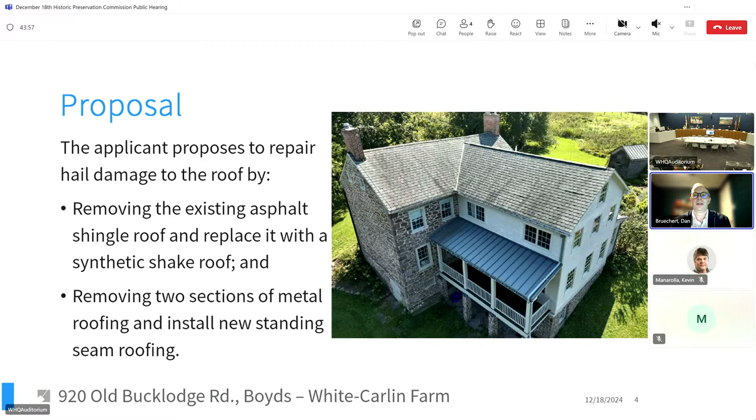So in its analysis in the staff report, staff was guided not only by the standards, but also by Preservation Brief 16, which talks about a framework for analyzing when substitute materials are appropriate on historic buildings, and how to evaluate proposed substitute materials.

Including what sizes and shapes are available, what variety of color choices there are, how stable is the color, will it age or weather the way a natural product would, what is its impact resistance or flame spread rating, what are the installation requirements of the new material since those may not be the same as the original material, can the feature be custom produced if ready-made ones of the new material are not available or an accurate match, and what is the expected lifespan or warranty?

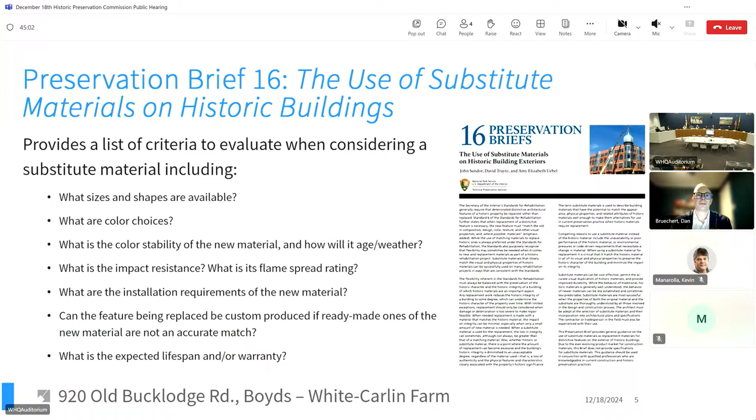So again, the proposed material is a Brava cedar shake, which is a synthetic shake. The shingles are provided in 3 widths to provide some size variation in the appearance of the finished roof. A material sample was distributed at the previous preliminary consultation, and I believe the applicants and their representative also have samples if the commissioners would wish to examine them in the flesh this evening.

Next slide. This is the front of the subject property. There is an existing asphalt shingle roof that's failing due to hail damage. There are also some underlying structural issues with the roof, which would be addressed at the time of removing the existing roof prior to reshingling.

Next slide, please. Again, these are just examples of 2 different colors of the shake. We have the aged cedar in the upper left, which is the mottled color that's proposed by the applicants, and then there is what I believe is called the natural color in the lower right.

Next slide, please. So staff visited multiple sites that had the Brava cedar shake installed. In the upper left, you see one example. This happened to be right next door to a house that had a natural wood shake roof on it, so that provided for direct comparison. I believe that was 14 Flame Leaf Court in Gaithersburg.

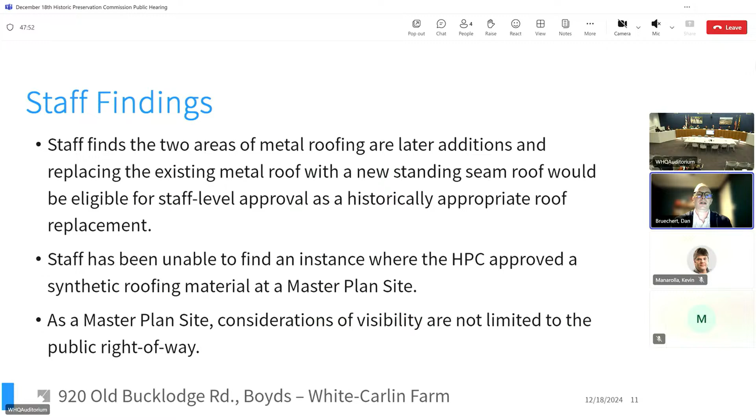A reminder, as a master plan site, considerations of visibility are not limited to the public right-of-way. This is for the visibility of the site from any location, including on the site itself. Next slide, please.

So staff's primary concerns with the material are its color and its reflectivity. The mottled appearance, which is intended to emulate aged wood, staff doesn't find to be a convincing substitute under 24A8B1 or 2. Additionally, staff hasn't been able to see a shingle without its sheen. The product representative relayed that part of the reflectivity was due to chemical release applied to the mold so they would peel off easier, and that the shingles will dull over time.

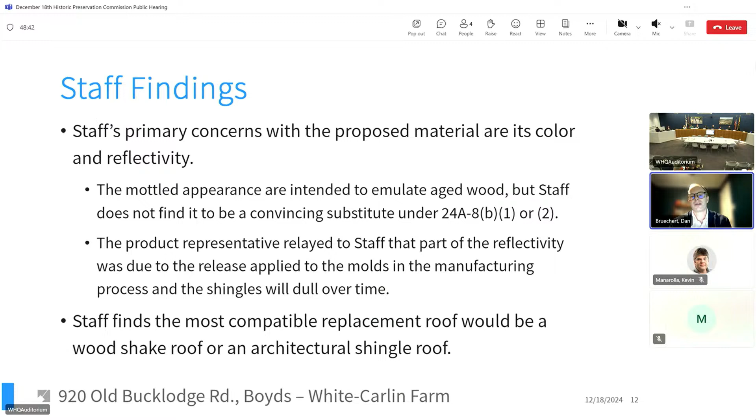The applicant did provide 2 photographs, which can be shared during their presentation. But staff finds that the most compatible replacement roof would be either a wood shake roof or an architectural shingle roof. And with that, I will answer any questions that you have at this time.

Are there any questions for staff?

Commissioner Doman: Of concern here is that this particular residence is a master plan site. If this was not a master plan site, would we consider these shingles applicable? Is it strictly because of the category that this house falls in that it's not acceptable? Would it be acceptable on something that just happened to be in a historic district?

Thank you. Based on staff's observations of the material, we don't think it would be appropriate on an existing resource in a historic district. The analysis for new construction or an addition in a historic district would be a little different and would likely be district dependent because so many of those have very specific district design guidelines. So in one district it might be acceptable, in another it might not be. But because we're dealing with a master plan site, we're limited to Chapter 24A and the standards as our guiding principles.

Yeah, I was just interested if there's any way the product could be installed so we could get historical information about how it holds up. I mean, would this be acceptable on a non-contributing resource in a historic district? Well, we haven't had that proposed yet, so we don't know. What I can say is that the applicant did provide us with 6 addresses where we know the material is up and can be periodically evaluated moving forward, but that's not going to give us an effective answer for tonight's discussion.

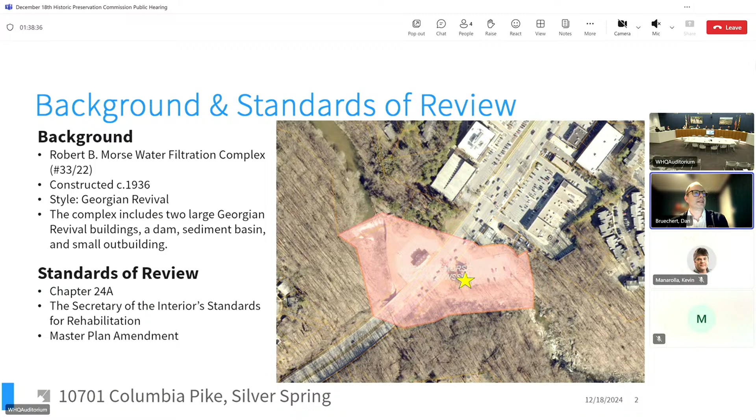Although the Morse filtration apparatus has been removed from the site, the distinctive pump houses and dam structures still stand. Next slide, please.

Montgomery County Parks is the applicant with Springsong Museum as its partner. The applicant proposes to rehab the southern building and its surrounding hardscape and landscape to create the Springsong Museum, dedicated to Rachel Carson and her life's work. This includes a large building addition constructed for museum operations, removing and replacing the existing windows, and landscape and hardscape alterations, including installing a solar array in the parking lot. Next slide, please.

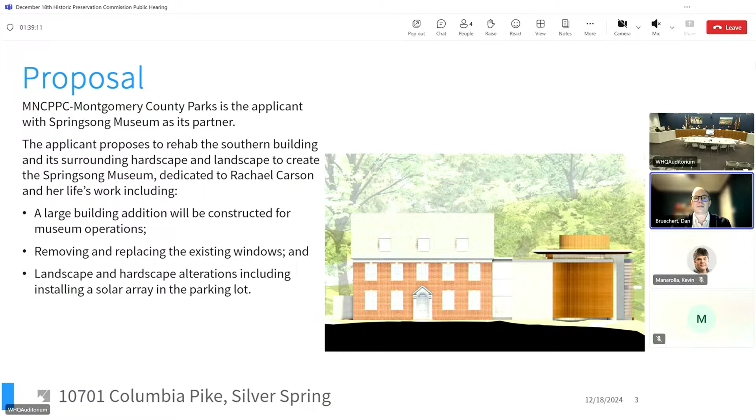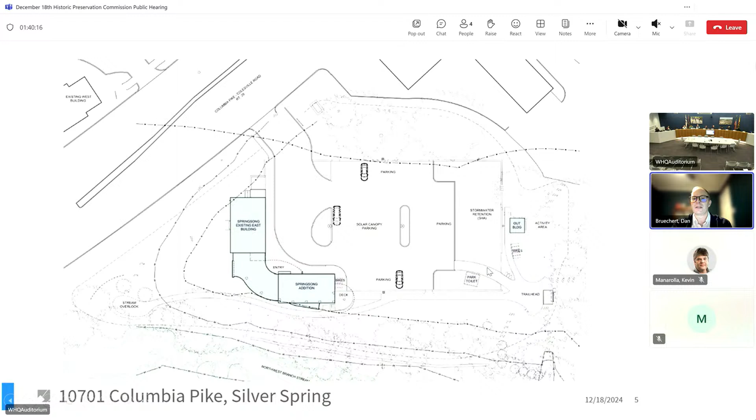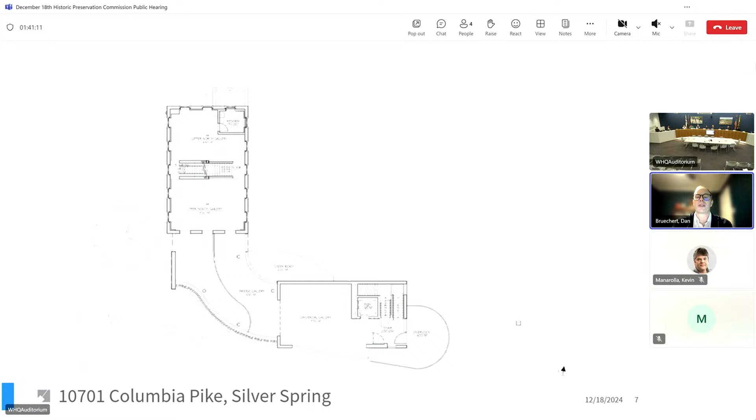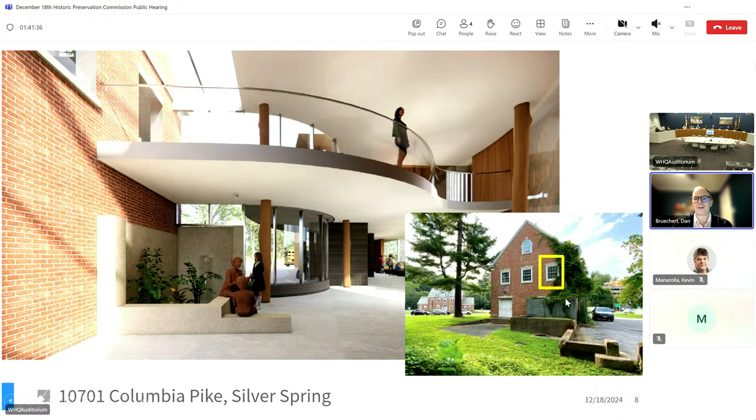So the main changes to the historic building you see in front of you: they're proposing to remove the window and potentially enlarge the opening to accommodate the bridge discussed previously. And then the aerator, the big concrete structure below the window, will be cut down a little bit and incorporated into the interior space of the museum as part of the rehab.

And then on the ground floor, the existing doorway will be opened up, and that will provide access from the interior of the museum space.

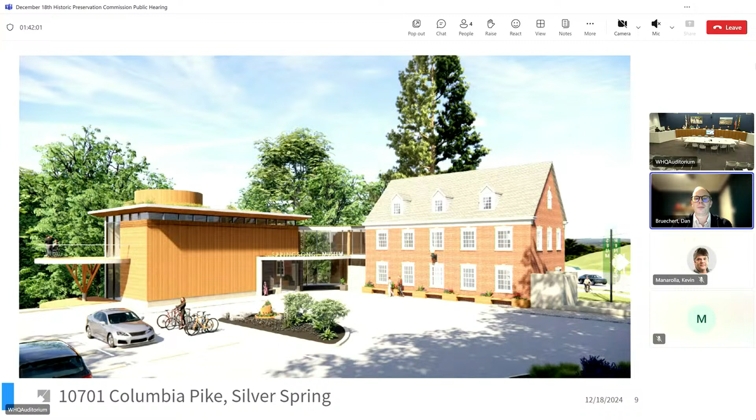So a perspective drawing from the parking lot without the solar canopy. You can see the hyphen is mostly glazed from this elevation, which helps create a visual separation between the historic building and the larger museum addition. Other materials proposed for the addition are wood siding, aluminum storefront supported curtain wall, and either poured in place or precast concrete panels.

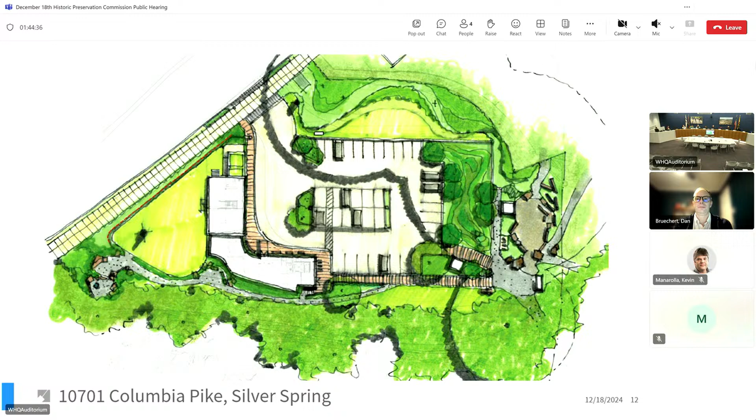So we can go to the next slide. The applicant provided some of these renderings as part of the overall landscape proposal for the site.

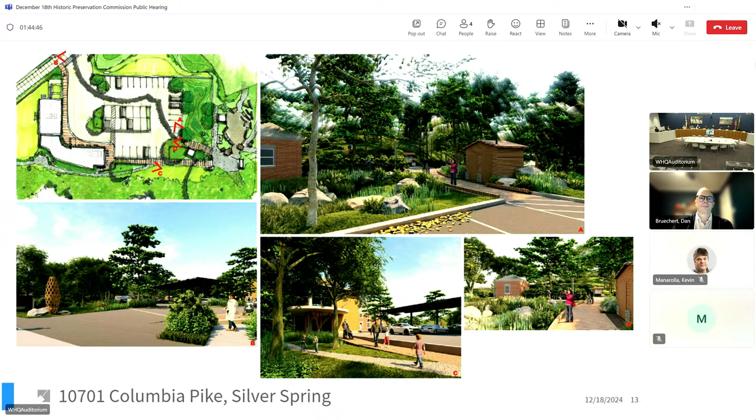So staff finds the location and amount of demolition are appropriate to maintain the historic character of the subject building. We find the location of the proposed addition is sensitive to the building and the larger master plan site, and that the size and massing of the proposed addition and hyphen will not overwhelm the historic building. We also appreciate that the location of the new construction will not interrupt the relationship between the two Georgian Revival buildings across the street from one another, so that vista will be maintained as part of this.

We further find that detailed specifications for the addition's design have not been provided at this point and should be discussed at a subsequent preliminary consultation, with larger size, scale, massing, and materials conversations to be had then. Having said that, while we feel the design of the hyphen and addition appear to be compatible, staff did find that the concrete panel on the south elevation between the glass hyphen and the wood screen wall was somewhat awkward, and recommended a revision either of materials or orientation, as that would really improve the vista, particularly because it was so close to the south elevation of the historic building.

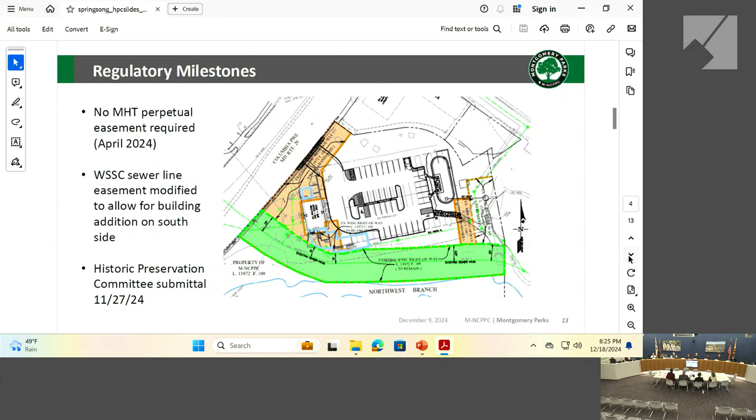If you go back one slide, please, because we just want to clarify one thing about the site: the State Highway Administration has claimed this eastern portion of the historic sedimentation basin, which is currently the parking lot, for a stormwater mitigation project of their own. I believe that's probably already been approved by you all, but it's something we're incorporating into our landscape design with a bridge across the top of it. So that's not technically part of our project, but is something that will happen on the site. The only other clarification we wanted to mention is that the building has been vacant for approximately 60 years and does have lead and asbestos issues. So we're excited to move this project forward to bring new life to this structure.

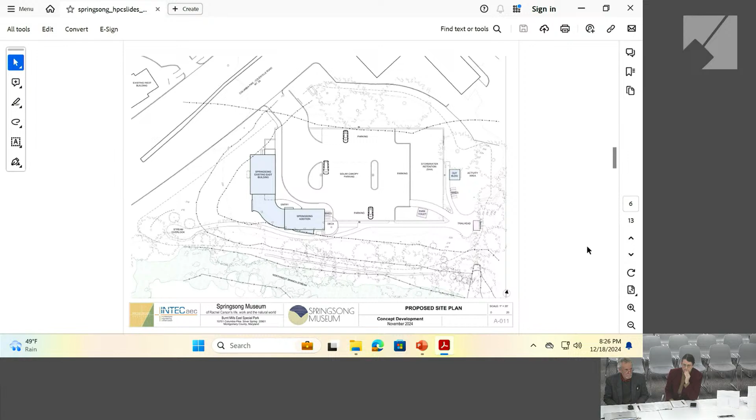Some of the drawings seem to be washed out, some lines are missing. I'm not sure why, our originals don't look like that. If you have any questions about that... It's fine, okay, thank you. Anything else? I think we're out of time.

Any questions? This is Commissioner Doman. I guess I'm a little bit confused. I'm looking at figure 3 of the staff report, and the new addition in the photograph or rendering appears to be wood, but it's not wood, is it?

The cladding at this point is shown as wood or some substitute that looks like wood, for which we are working with a sustainability consultant, since there are myriad questions about the origin of materials, their recyclability, and others. I'm certainly accepting any input, but if you're questioning whether we would use wood, we would.

No, but when you talk about concrete, there's an issue about the concrete—I think you have the wrong facade, it's the other side of the building. Oh, it's on the riverside, as opposed to being on the street side, in the back, Columbia Pike actually. Oh yeah, okay, it depends, it's because it sits at an angle, so which is the street—okay, I understand. Which way is north and south is confusing.

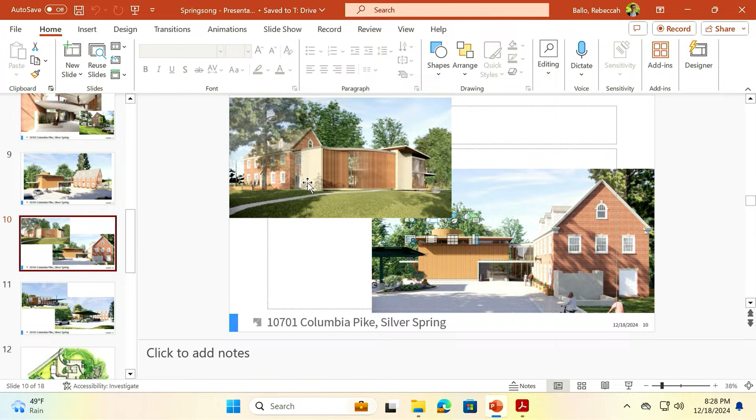But what I see in here, in this picture, it looks like a big wood wall. Is that—when you pull in off of Columbia Pike, you can see where the entrance is and the hyphen is, and then to the left there's this big wooden wall. Is that envisioned to be a wood wall right there? Is that what you have? They would be vertical wood elements, yes, altogether. Do you have wood siding like solid cedar or mahogany or something? Is that what, or don't you know yet? We don't know yet.

Okay, but basically it's just one big blank wall. It's what we're looking at right there, right? Yep, okay, it's kind of strange.

And my other question: who owns this? I know you're with Spring Song, but Montgomery Parks owns the property. Who's paying for this? I'm wondering how is this all going to happen. Is it Commissioner Doman? I might recommend that the applicants, a lot of the funding for this is still being pulled together. There's a lot of players here. I wouldn't necessarily expect them to be able to answer all of those questions right now. So in the future when they come back, that could certainly be a topic of conversation about how the deal is being put together for the museum.

I was just wondering who the applicant was. The applicant, again, is Montgomery Parks. Spring Song Museum is a partner. This type of partnership arrangement is common, not super common, but it has happened before with Montgomery Parks properties where there is an operator that will program a site. Spring Song Museum will be programming this part of the Robert Morris filtration plant, which is going to continue to be owned by Montgomery Parks.

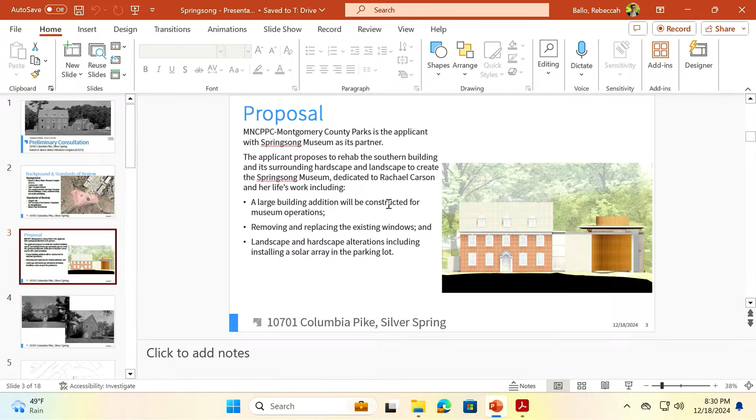Okay, and I drove by it. Actually, I drove in, I parked the car, and I walked around, and I saw the whole thing. There's a little small house at the far northeast end, down there, with a little pointed roof on it. What is that, and is that going to stay? Yes, that's part of the historic water filtration plant site. It's a little pump building, and we intend to maintain that as part of the project and potentially use it as a staging site for outdoor classroom activities near the trailhead.

And you envision some kind of a composting toilet out there too? Yes, that's the little freestanding building towards the east of the sedimentation pond. That's the proposed location to facilitate hikers using facilities when they're visiting the site.

I understand. Could I just say something in response to your perceived concern about the wood wall as you come into the parking lot? It's not just a wood wall, right? The cornice lines of the hyphen and the addition are responding to the cornice line of the historic project, and there are clerestory windows also. But primarily it would be sort of a wood vertical siding element as we are proposing it, because it's the service side of the building, with the big reveal on the other side being the glassy wall that faces the stream side.

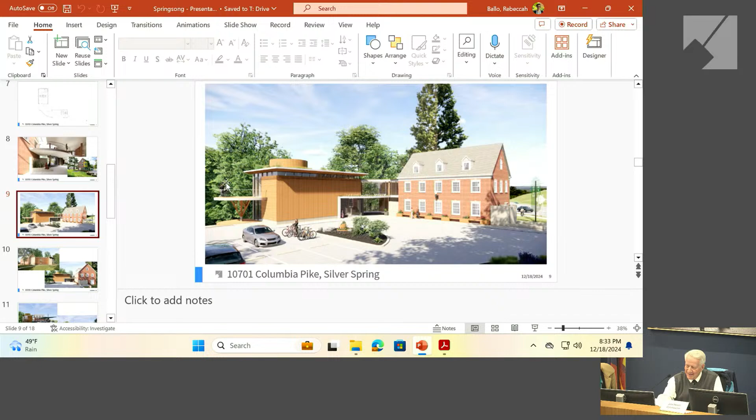Commissioner Pelletier: Can you talk a little bit about why the big concrete wall is there? It looks like it's hiding something. I'm expecting to see this glassy hyphen, and then there's this very freestanding big thing that looks like it's covering something up. So can you talk a little bit about what the strategy was there?

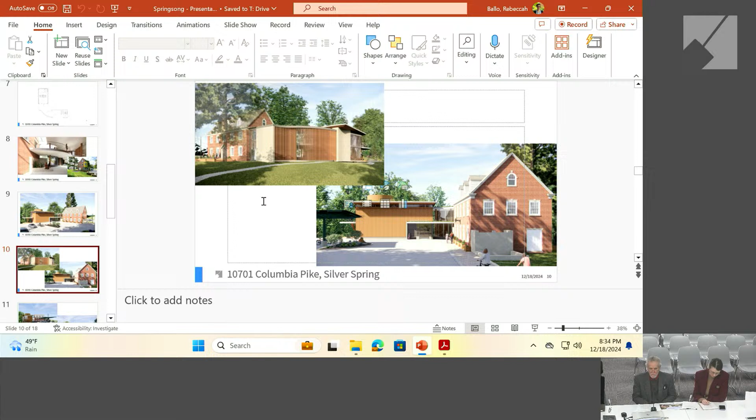Well, first of all, I think that material which we chose to show is the same sort of concrete that you would see on the other side of the building that's part of the existing artifact. The development of this wall actually began with it having a large circular embossed logo. And we got some feedback from Parks who were a little concerned that if we made a logo so permanent, then years from now, if they had to own the building, they wouldn't know what to do with that logo. But there are other ways of doing that.

One thing I should mention too is that there's a very tall pine tree in front of that wall, which is going to be coming down, so it exposes that wall actually even more. But this is a contemporary addition, and it does make use of clean, and some might think stark, but proportioned properly and the right materials - hopefully a beautiful building.

Thank you so much for the presentation. I appreciate the history and background and also the renderings, I think it helps us wrap our head around it. And I'm familiar with the site too, having driven by a few times.

I have a question about the size and scale of the hyphen connecting the two buildings. I understand the horizontal line responding to the lower edge of the roof line of the historic structure, but I wondered if the hyphen was at its minimal height needed to accommodate two floors of walking across the bridge, or if it could be reduced.

I also understand the location setback on the opposite side of that hyphen where the curve is, but had you considered pushing it back relative to the front facade of the historic structure as well, just to break it up more? If you could walk us through that discussion, I think we'd benefit from it as we seek to understand the massing and provide comment.

Thank you. Well, we can't really lower the hyphen any because we have a green roof on top of that, so the roof structure is going to be deeper, thicker than average. Any museum honoring Rachel Carson is going to be a sustainable building, and green roofs are part of that. We do need both stories to connect to the hyphen just to make the building work. There was another question in there.

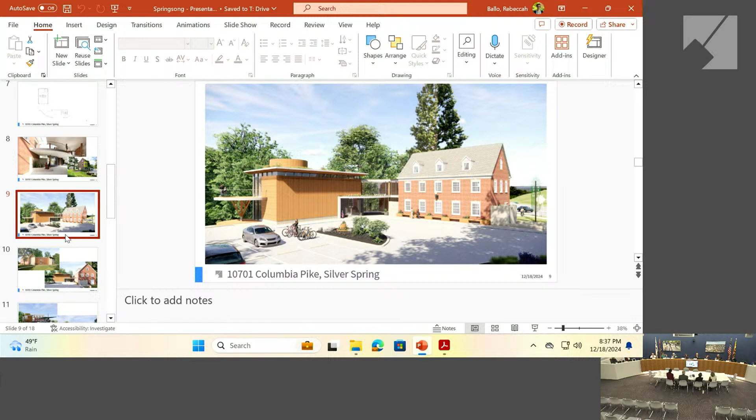Excuse me, how far forward the edge of the hyphen is towards the parking lot, kind of above where it says museum in letters, how far forward that is. I was curious if it had been considered or how you arrived at that arrangement. I thought perhaps setting it back relative to the front plane of the historic structure, for example, to break it up more.

It's just tight between the parking lot and getting cars in and out, and the parking lot design has to accommodate fire and rescue. We don't have any room to do that. Thank you.

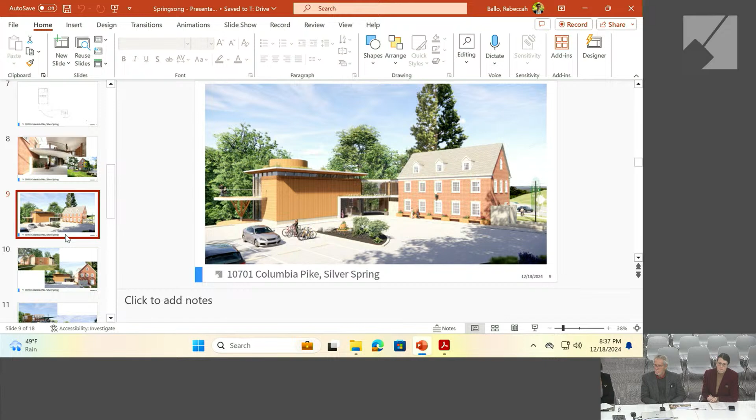Anyone else? Let's see if anyone else. Commissioner Burdett? My question isn't related so much to your building, as I recall several years ago there was some significant flooding in this location.

Is your building designed to withstand the flooding of the size that happened five to ten years ago, something like that? Or what plans do you have to mitigate any damage from possible flooding?

We're not in the floodplain, actually, this particular building, but we're going to be held to some standards for the existing basement that's under the building now, that any sort of electrical equipment, anything that's down there has to be up above 3 feet. So that, and it can't really be used for anything else. But because we're not in the floodplain, we haven't needed to make any accommodations for that.

And during that flood, do you want to speak to that? The building itself tends not to flood. It's the other side of Route 29, as you would guess, being close to the dam and the water there, that does flood more. But when you look at aerial pictures of the floods that have occurred there, this building kind of stands as a little island.